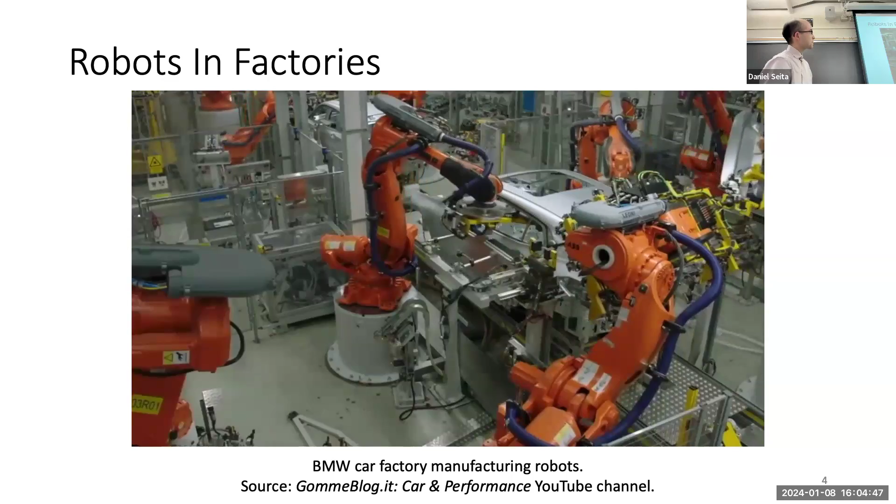This is really nice and effective for something like mass production, where the robots are doing the same thing over and over again, because you could just program the robot so every time this new thing happens, it just goes to the same picking pose, the same placing pose each time. So the robots are very reliable when you ask them to be repetitive, and when they know everything in the environment.

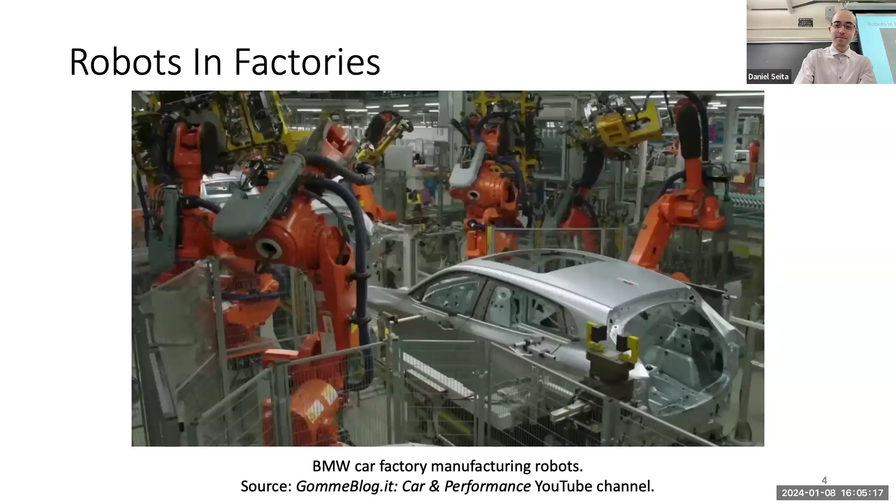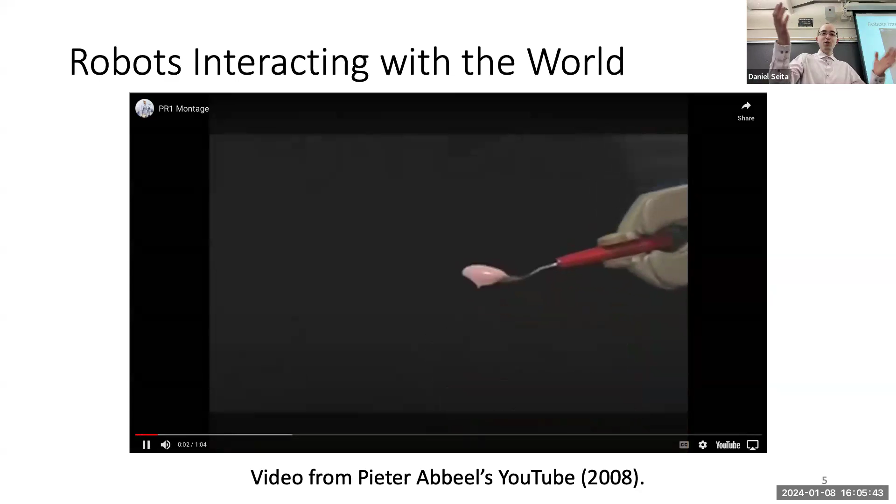But let's talk more about robots that we might want to interact with in our world, in the less structured portion of the world. This is a video shared from Pieter Abbeel, one of my professors at Berkeley, and I'll just play the video. It shows this PR1 robot, a really old robot that I don't think people can make anymore, using different utensils, putting things in the dishwasher, and sweeping stuff.

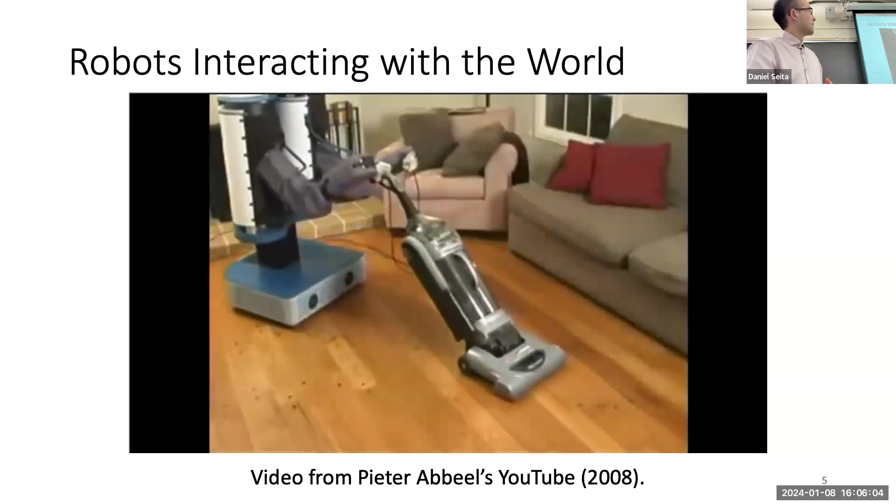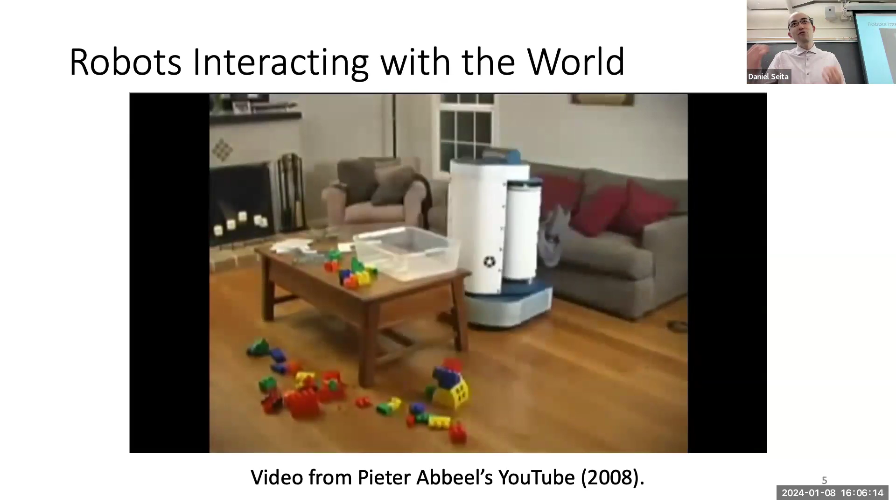So the dream that many robotics researchers, myself included, have is that it would be nice to have robots that can do stuff like that, like maybe a home robot that we can ask to do different chores or to help us live our daily lives.

But the problem, at least with this video, is that everything is teleoperated. There's a human operator controlling the robot. In this case, I think it's a beer can or something, and the robot is trying to open the cap and give it to the person. But while this is happening, there's another human that's not shown who is controlling the robot.

The key takeaway is that if with the hardware, a human can control the robot to do many interesting things, then maybe we just need better algorithms, because we have the hardware. The hardware we just showed can do this. We just need to help the robot make the decision autonomously instead of the human teleoperating it.

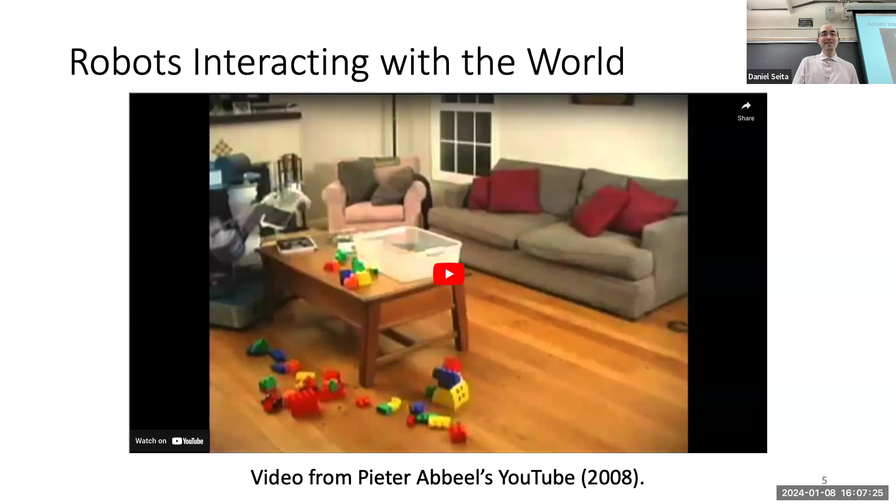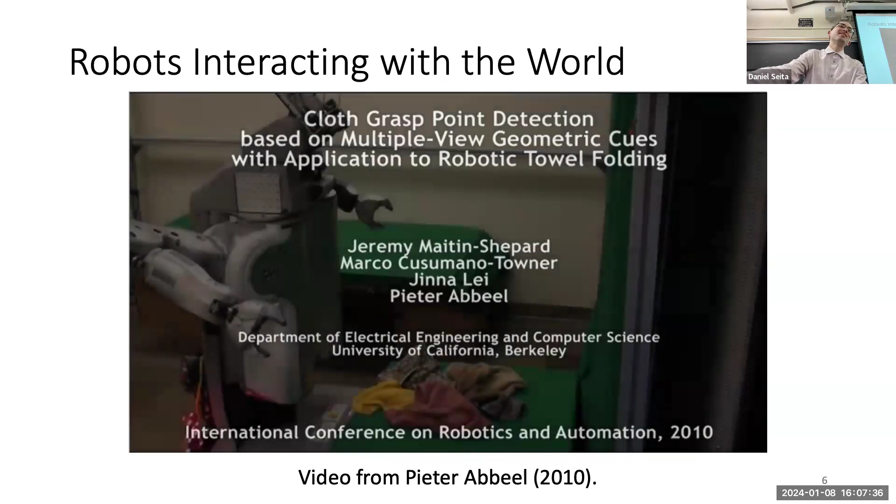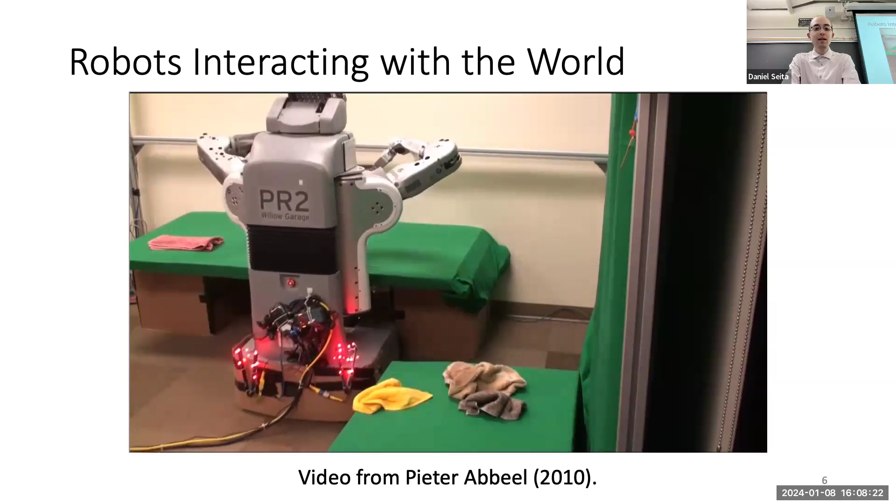Here's another fun video, also from Pieter Abbeel's group, showing the PR2 robot, the next version of the PR1 robot. It has a bunch of towels, it's grasping and scrutinizing a lot, trying to figure out where to grasp so it can grab different corners. Once it's been sufficiently grasped at two corners, it does a hard-coded folding procedure, then repeats. This was autonomous - they developed this algorithm so the robot could do this task with no human teleoperating. It's a nice result on how you get robots to do these things.

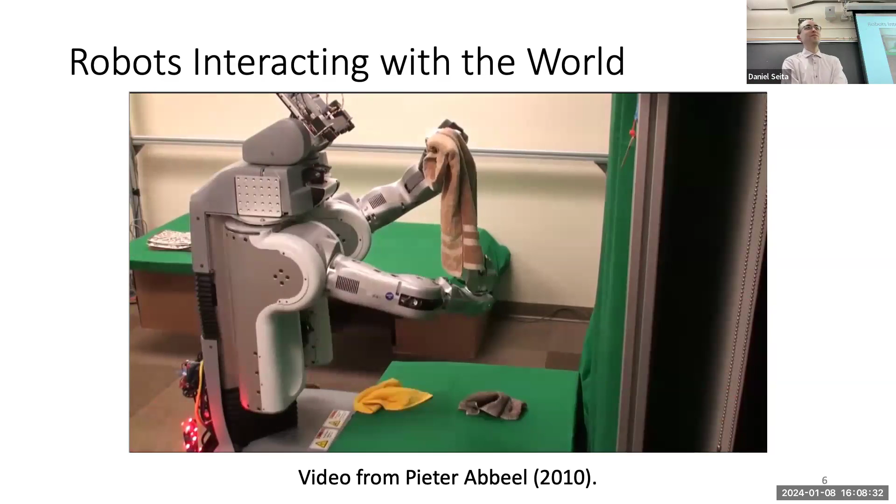If you look at the YouTube video comments, you see a bunch of people saying, wow this is very cool, I want robots like this in my home. Even for people who are a little more technical, it's still a nice system result to show robots doing this.

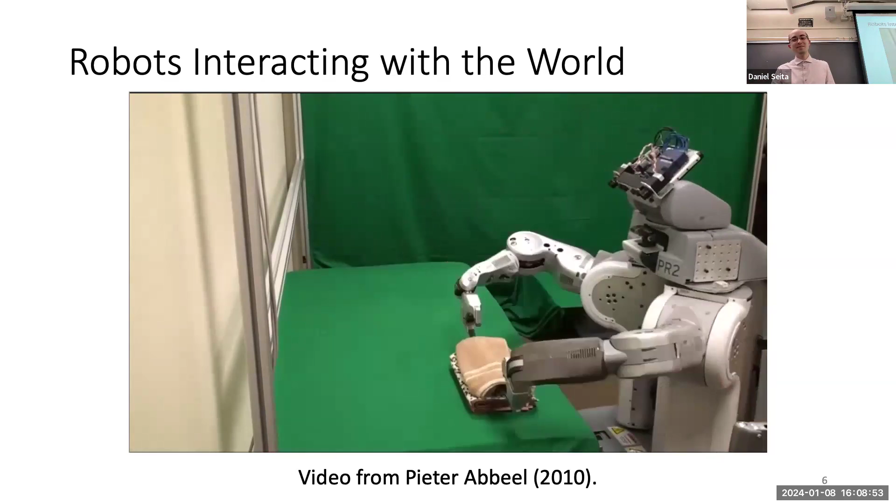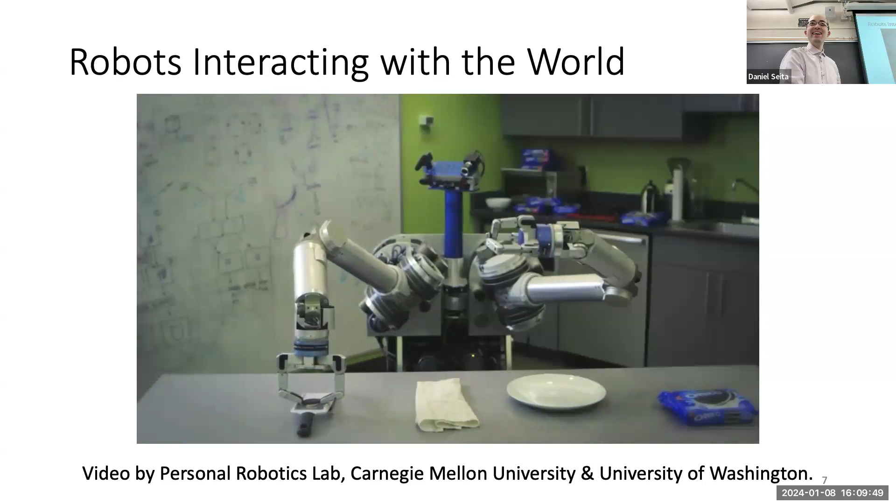One thing you'll hopefully learn from this class is that fine grain manipulation is very difficult. Robots tend to be very good at things like putting together massive car parts, but less good at fine grain tasks like knot tying. It's scraping away the inside of the Oreo cookie - the filling, the cream.

This is a video from a lab here at USC from Stefanos Nikolaidis, who actually taught this course last semester.

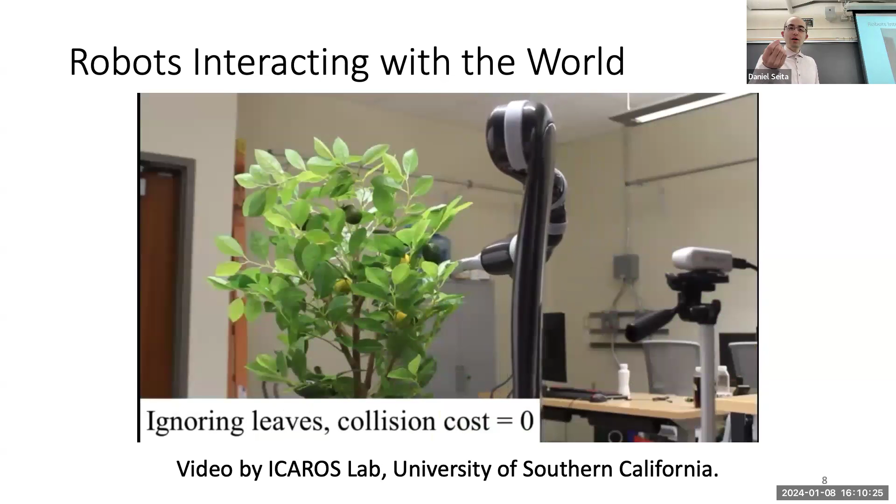Here's a nice video where they're trying to do robotic fruit picking. The objective is they have this robot arm trying to go inside a tree to retrieve some fruit. From a technical view, one interesting novelty is that they're making contact with parts of the tree that aren't what they're grasping.

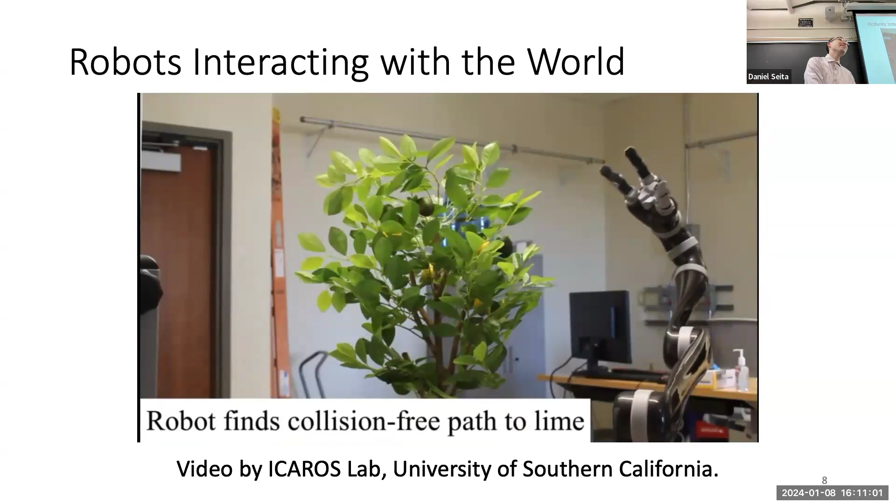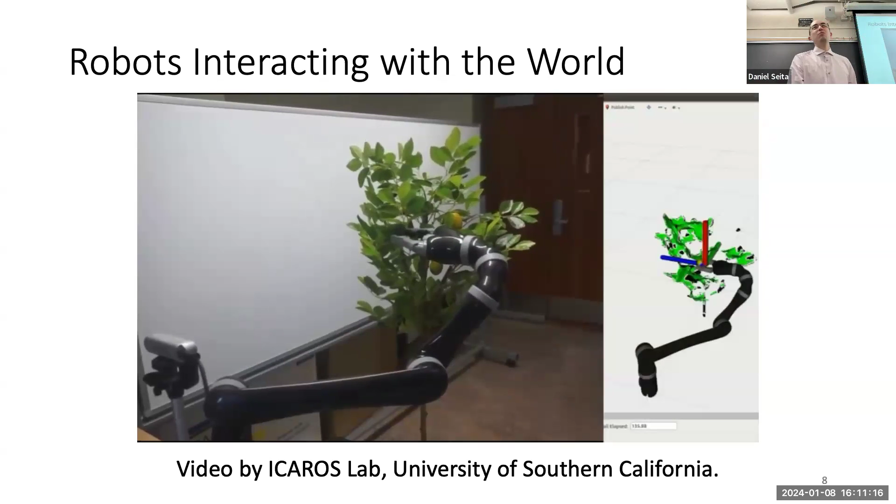You'll learn later when we talk about motion planning that when we want robots to execute trajectories in the world, we want them to reach a pose but make no collision with obstacles. But with leaves, it's not a problem if we make contact - it's not like delicate wine glasses that we cannot touch. We'll talk more about that when we discuss motion planning and how robots decide how to reach a target subject to different constraints.

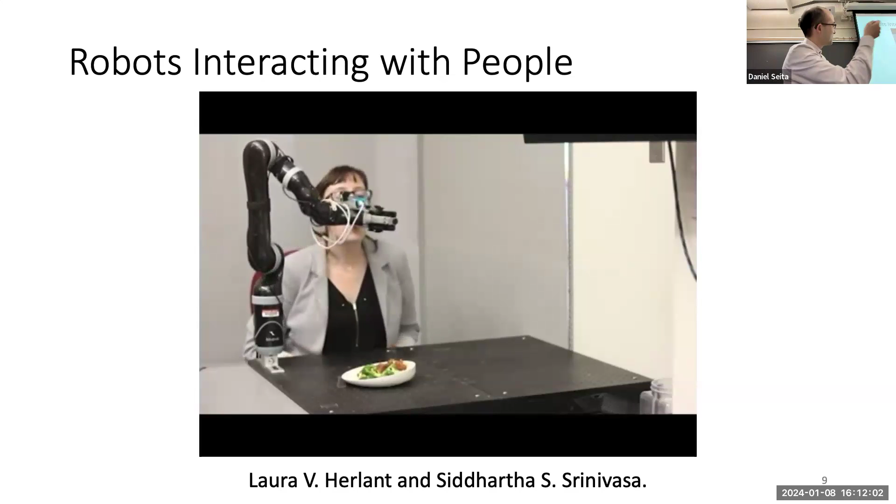In this case, there's some food here, I think it's maybe broccoli, and the robot is giving it to the right pose for the patient to eat. I don't know if it's a patient here or maybe a researcher.

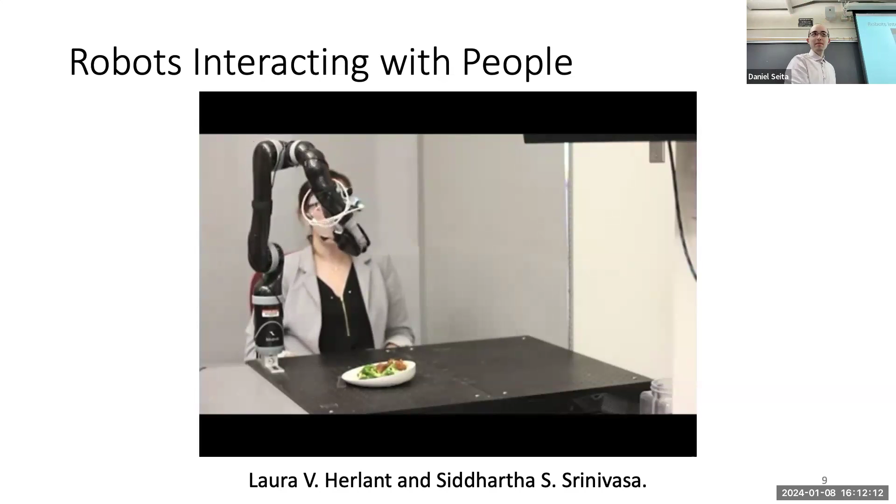When we design robots that do this, we have to take into account not just the kinematics of the robot arm, but the tool that it's holding, or maybe the tool that happens to be attached to it.

All right, here's another video. So this is Stefanos, some of you might know who he is, he's the professor who taught it last semester. This is Nathaniel, one of his PhD students. And now they're showing off their really nice system for hair combing. You see all these people taking photos, and it looks pretty cool.

Then I think they're going to do some hair combing soon. Yeah, there we go. Yep, now we have a robot that can comb people's hair.

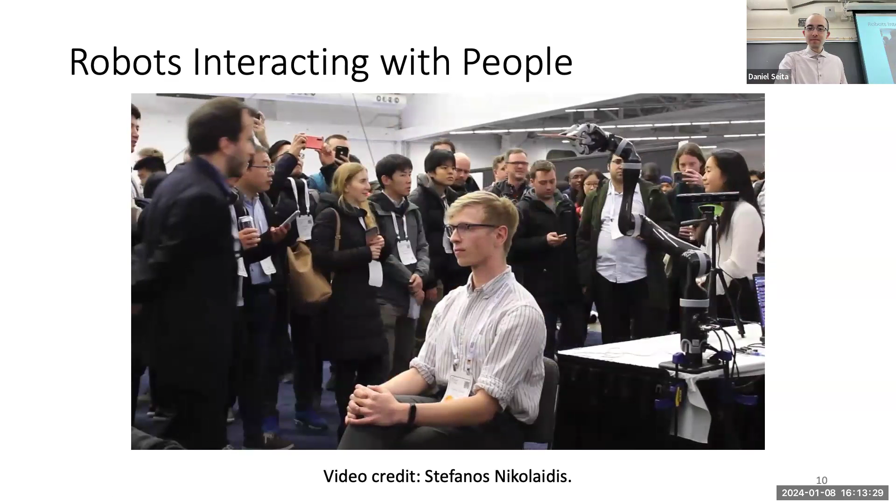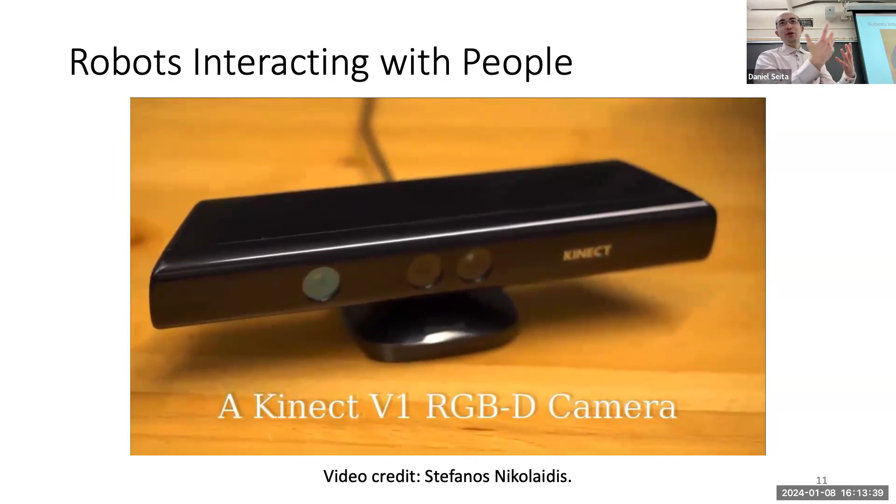And this is in a little more technical detail how the system works. There's some camera because you need to see the scene. There's the robot arm, we have them at USC. You might get the opportunity to use them as part of this class. You have to locate the user's hair, and we'll talk a little bit more in the perception part about things like color and depth and how they're used in robotics.

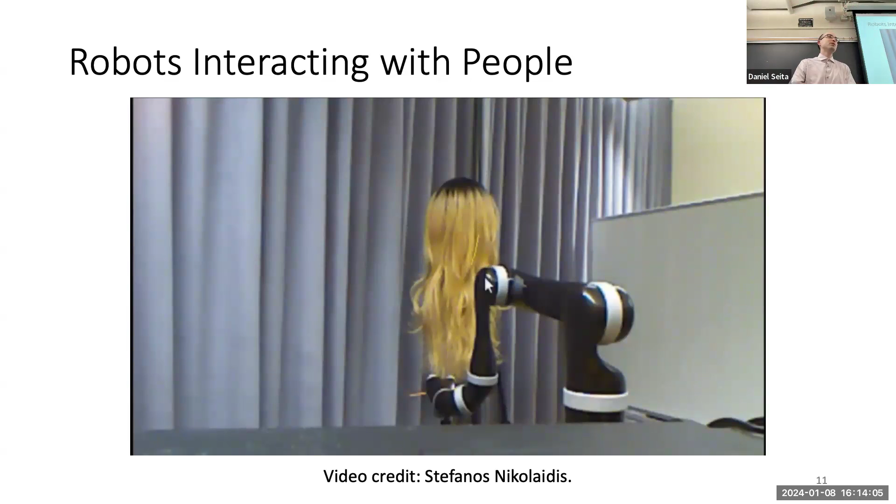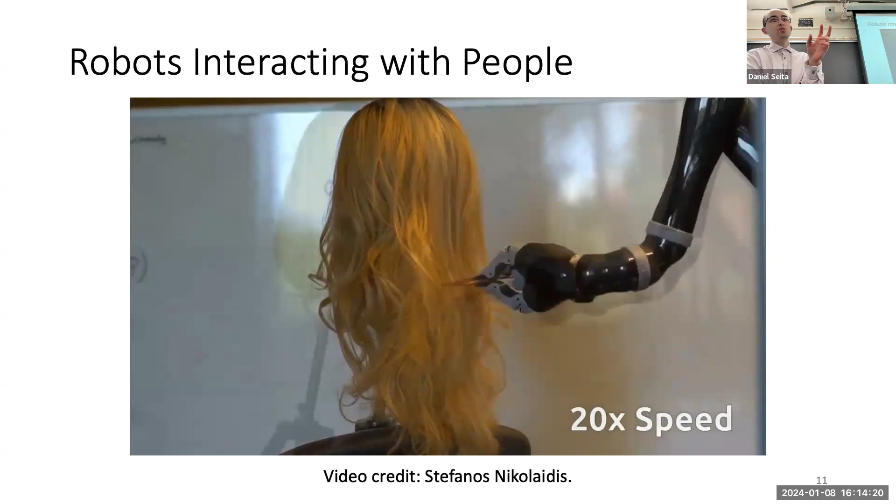And as with many things in robotics, it helps to test in a simulated environment, or something that's not the real thing, before you deploy it. So that's the test scenario. And it's 20x speed, so just be aware of the speed of the video when you look at a lot of robotics videos, because many academic researchers will speed up the video for obvious reasons. And many robots also move very slowly, also for obvious reasons, to keep things safe.

Hi, so there's many more robot systems. These are just a representative sample of some systems that people have done. So this is a nice system that shows the mobile robot. And the researcher here, Jimmy, was trying to train these robots to push blocks to that receptacle.

One of the things he did here was use a technique known as reinforcement learning, which we will talk about later in the class, on how to more efficiently move the item to that receptacle. So instead of doing it one by one, the more sophisticated version will try to group them together and then use the wall to get more of the blocks there at once. That's a little more efficient use of the robot's time.

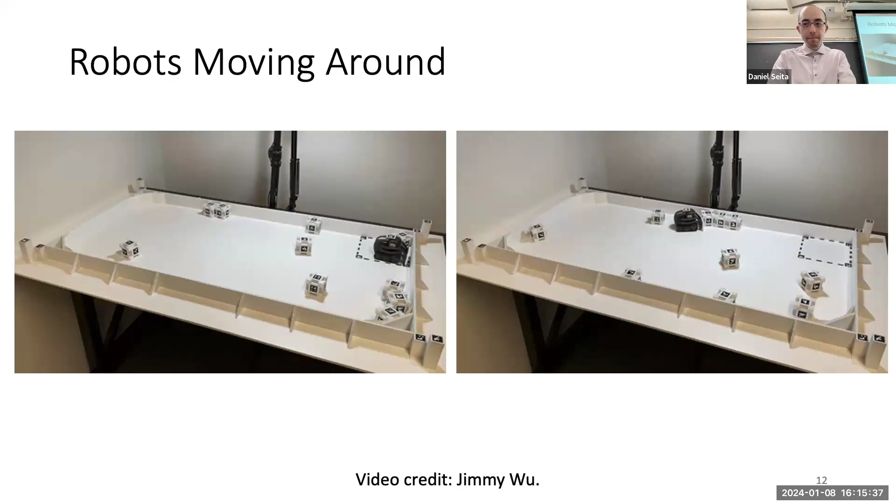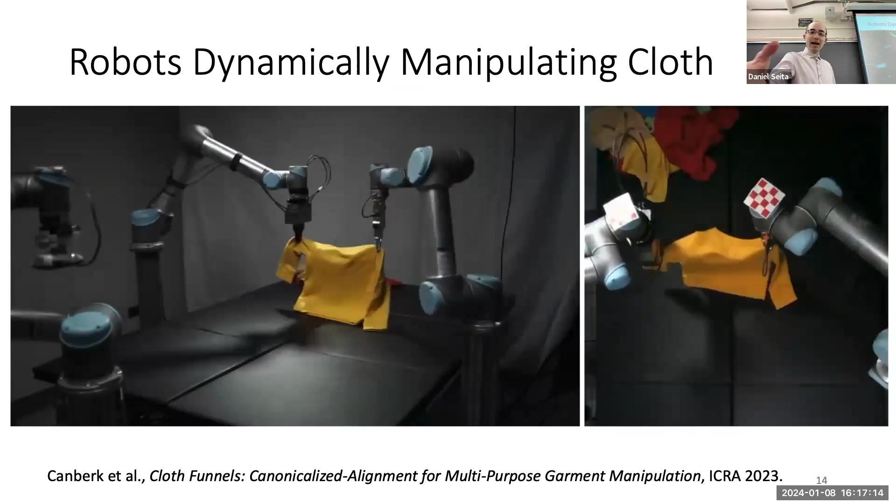Robots can also do things like dynamically manipulate cloth. This is actually a dual arm system—there's a third robot that's just holding the camera. Here they're doing a bunch of picking and placing to try to smooth it, while also doing dynamic motion to spread it out. The nice thing about this work was it showed how you combine a dynamic motion with what we call a quasi-static motion, which is a slower action that lets the object stabilize before the robot does another action.

Let me play the video again, it's a bit short. And then, yeah, you see the dynamic motion each time they do it.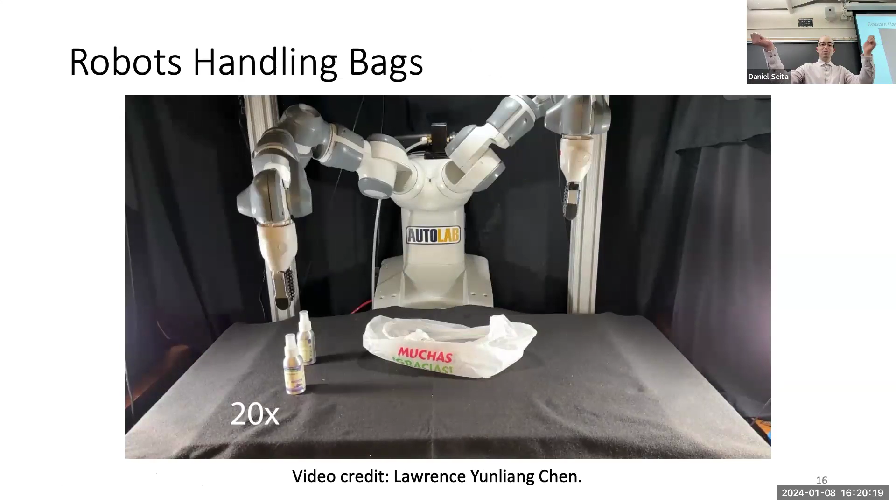All right, so this is one of the works that I was on. I helped to advise this project. Lawrence is a PhD student at Berkeley, and he helped to build the system that performs actions on these highly deformable bags. So the robot is able to do a bunch of primitive actions, and then once the bag is sufficiently open, it can insert the items in there.

I'll play it one more time. Again, the video is at 20x speed, but a lot of the delay is because we had to take the image and then do a lot of operations on it to segment it and decide what to do next, and so on.

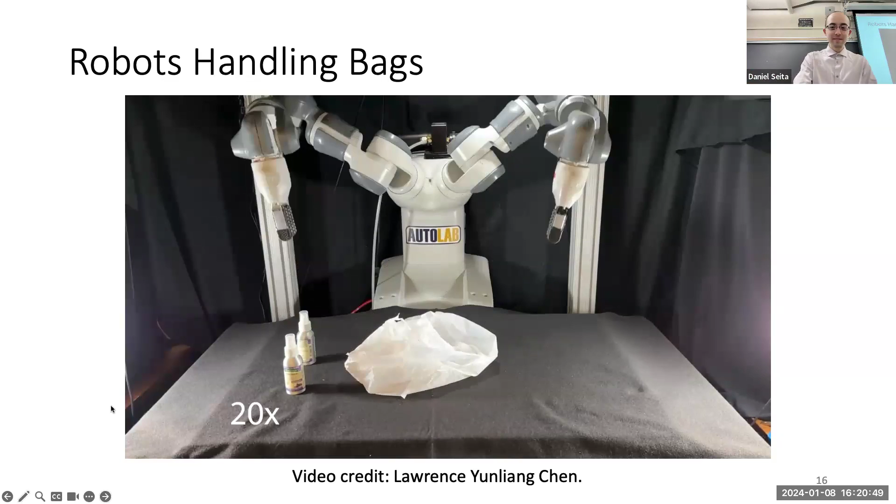And this is our follow-up paper, which we presented a few months ago. Here we're trying to separate different layers of the bag. So the intuition here is when the robot is trying to pull and separate the bag, you can detect whether it got the layer or whether it didn't.

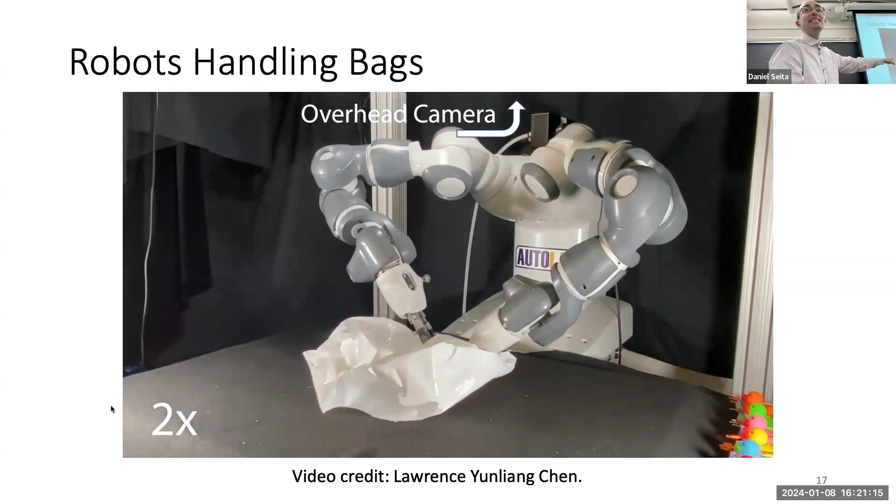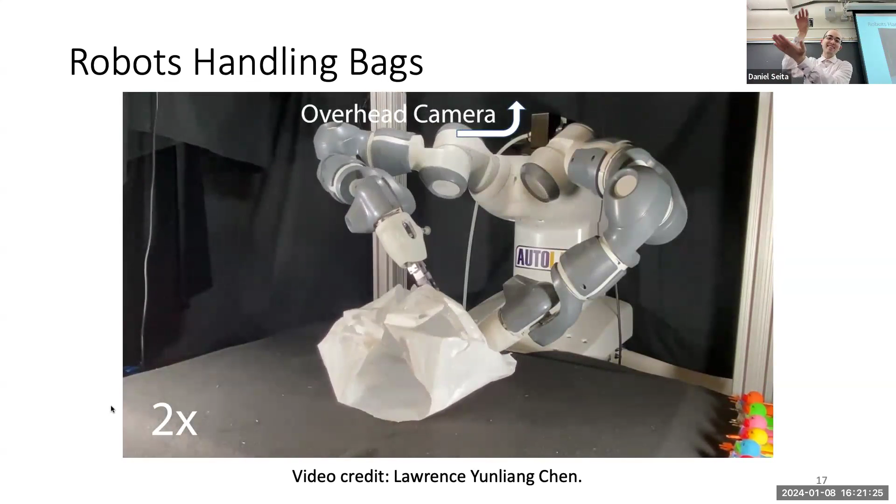In the first case, it didn't. It didn't do it again. But each time that happened, you can just lower the height where the gripper goes. So if you lower it enough, then eventually you'll separate the layers. That kind of thing is often the first step in order to do a lot of interesting operations on the bag.

All right, so robots can also operate on dough. This was work that was presented at the Conference on Robot Learning a few months ago.

So the researchers are trying to get this robot to make a dumpling. It involves things like, you start with a dough, you pick a tool—they use different 3D printed stuff to help, so that the robot doesn't actually grip the tool, it just attaches to it.

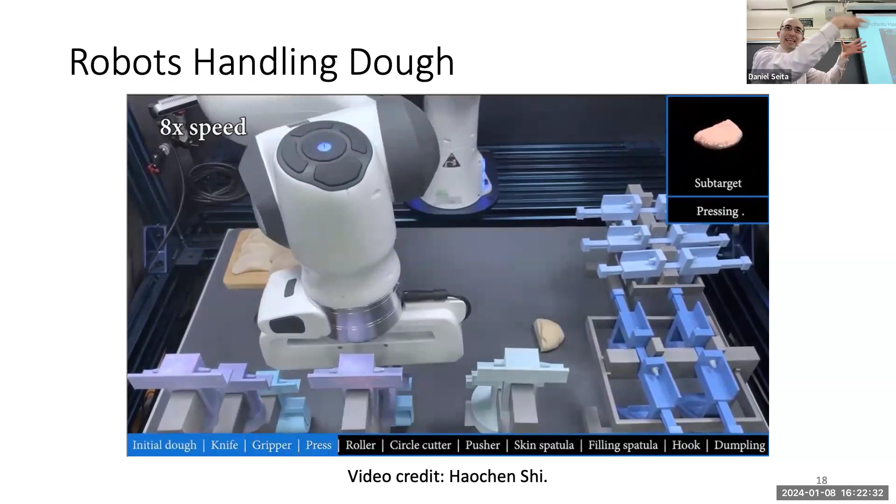And then once you're at that stage, you'll now flatten the dough, and then they have to try to make it even. Then they flatten it, and I think they have to use the tool to make it circular. And then they have to brush aside the remaining stuff.

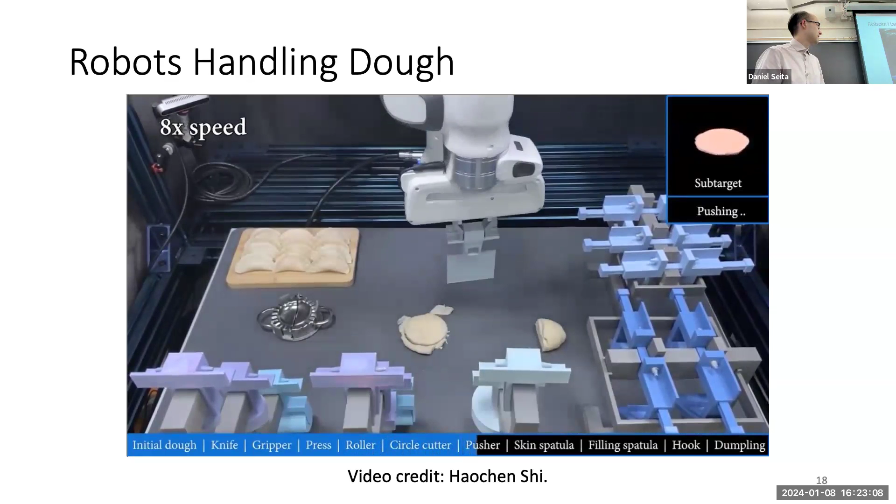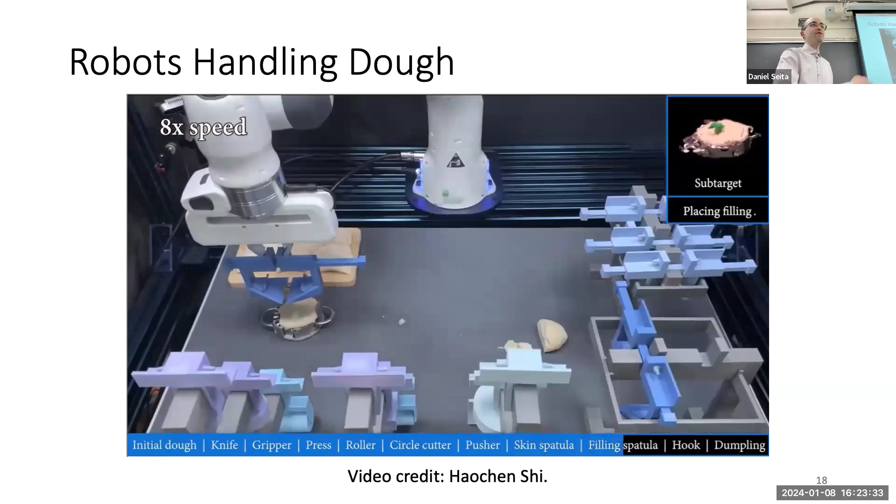And from a technical view, each time the robot is at some stage, there's a classifier that is trained to predict what tool should be used next. And conditioned on a given tool, they restrict the action space to be specialized to the tool. So it's not the most flexible action space.

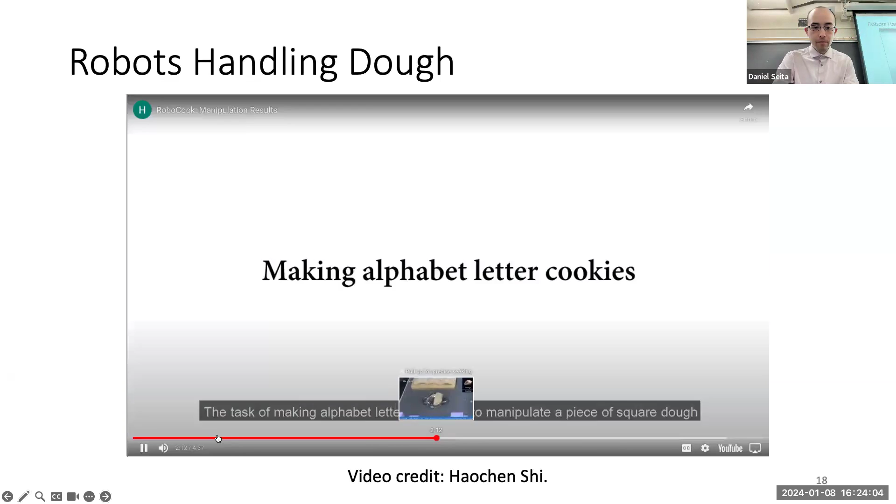And then they show that they make the dumpling. Of course, it has a small amount of filling, so it's not like it has a huge amount of filling inside, but maybe that's future work, they can increase the size of the filling. You can look online for the rest of the video, and they also have some nice robustness results where a human operator tried to destroy part of the dumpling, and it shows the robot can recover from that and continue.

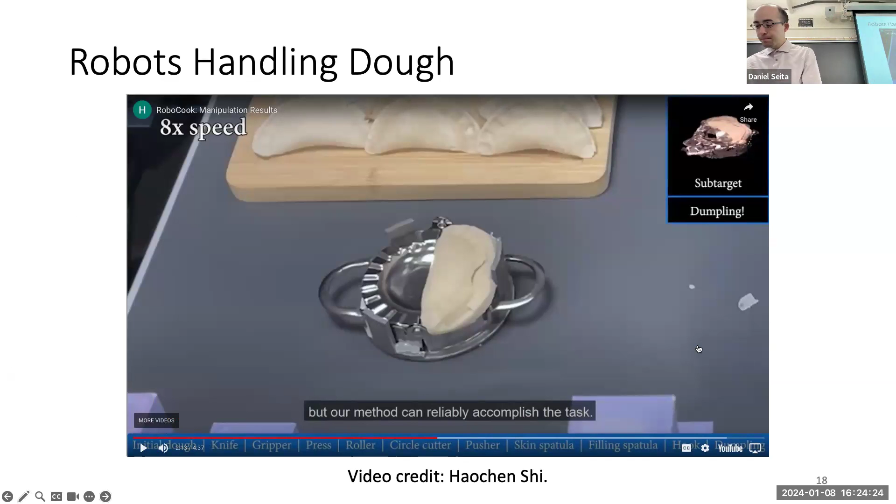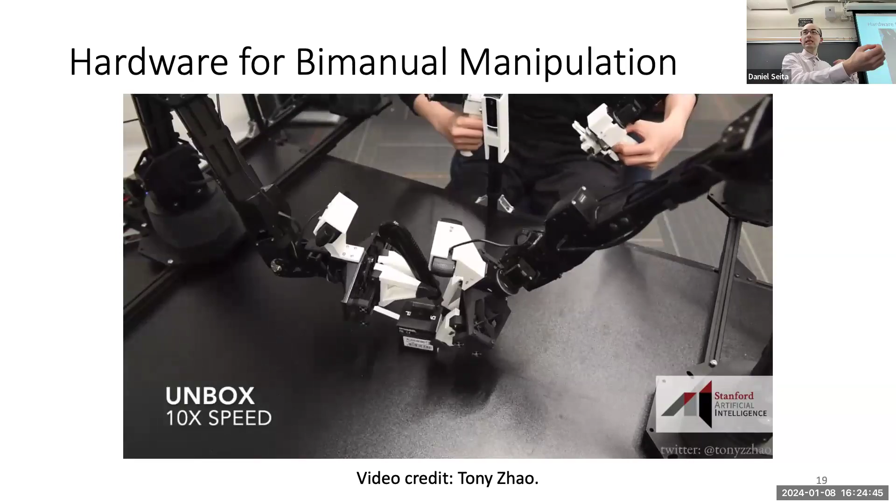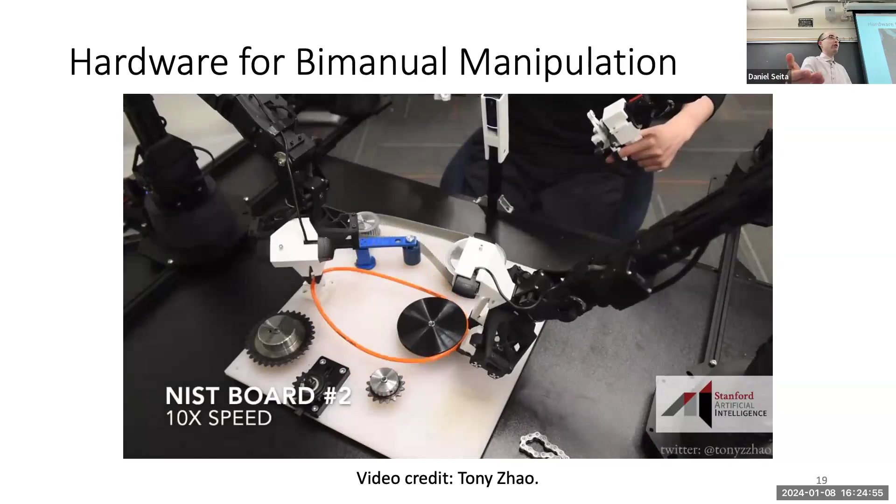Tony from Stanford helped build this bimanual system called the ALOHA system. This is the human doing the teleoperation. I guess the point of this video is to show that this hardware is capable of doing many delicate, fine-grained tasks.

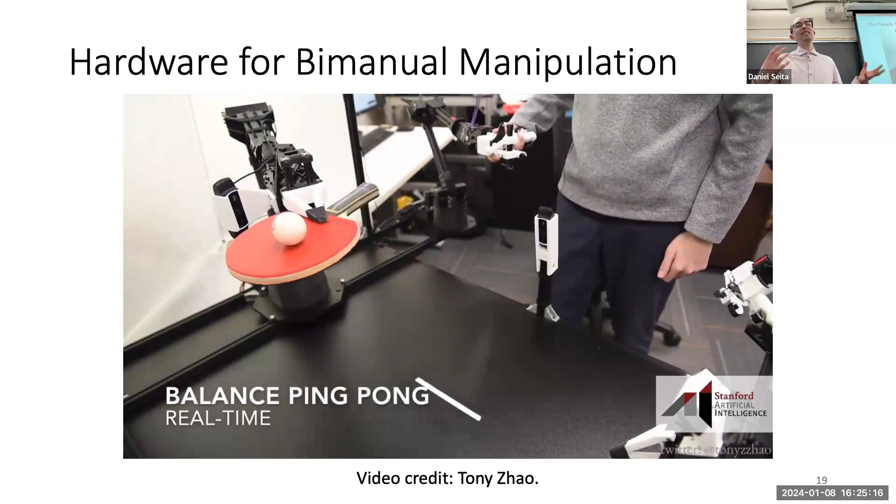If we can do teleoperation, maybe that gives us demonstration data to help train the robot to do similar manipulation tasks. Remember I mentioned earlier that fine-grained, delicate manipulation is very difficult for robots to do, so I think they're trying to push forward in that direction.

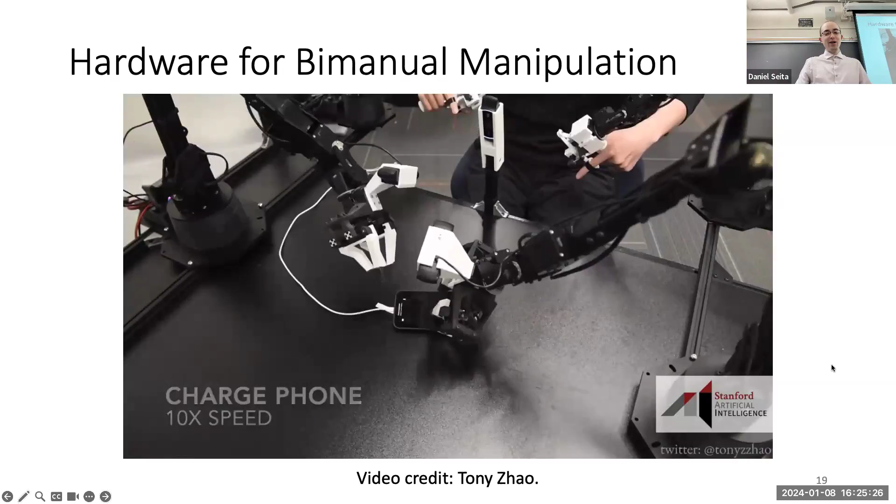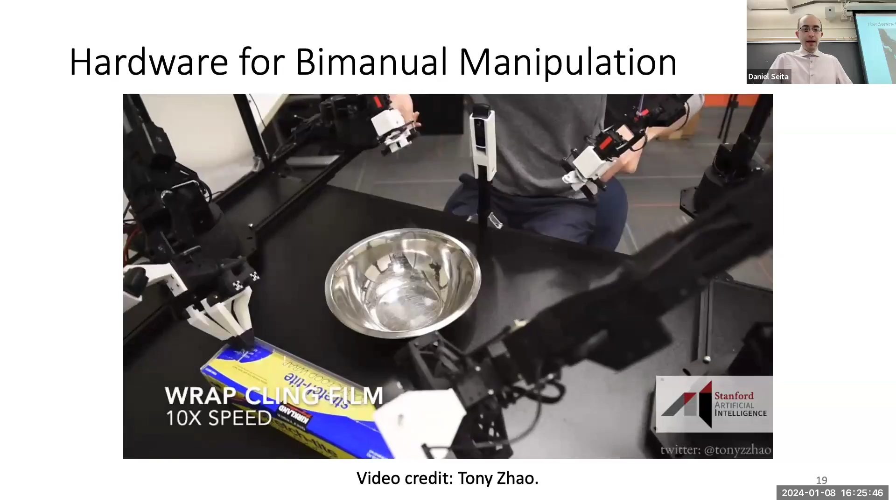I'll play the whole video because it does look pretty cool. In addition, you can look at the website to see the autonomous robot learning from the demonstration and then deploy to do the task. This particular thing is not using any tactile feedback, it's just using mainly the visual part.

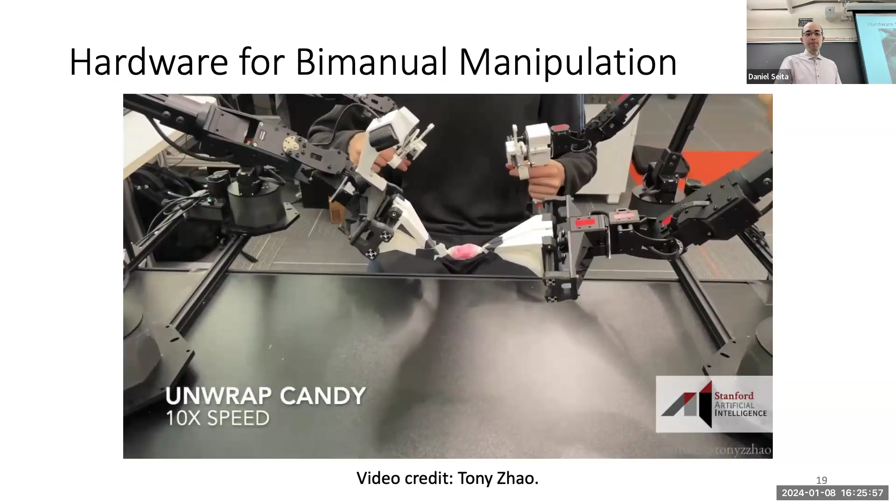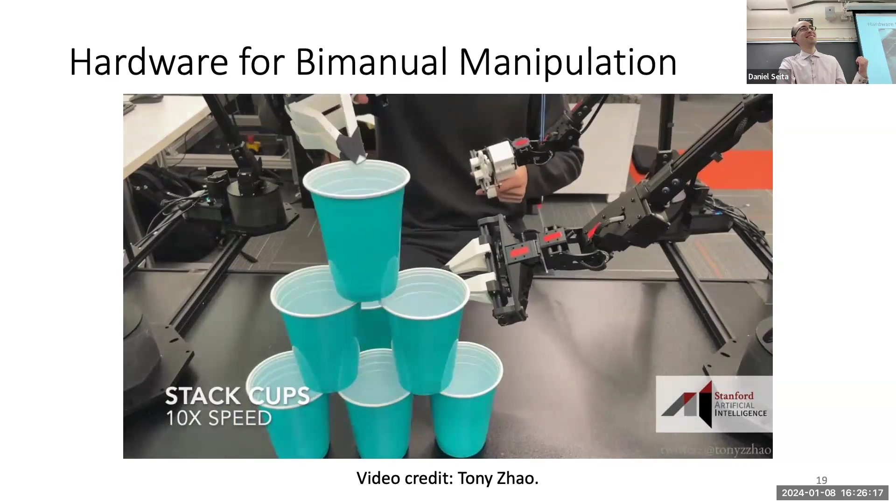How many of you know what slide I'm going to show next? Yeah. Oh yeah, I mean, what do you think? This thing? Okay.

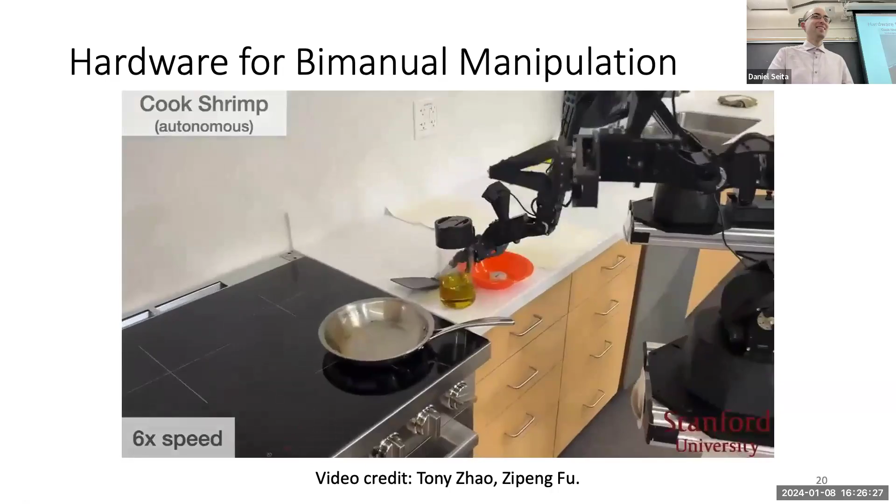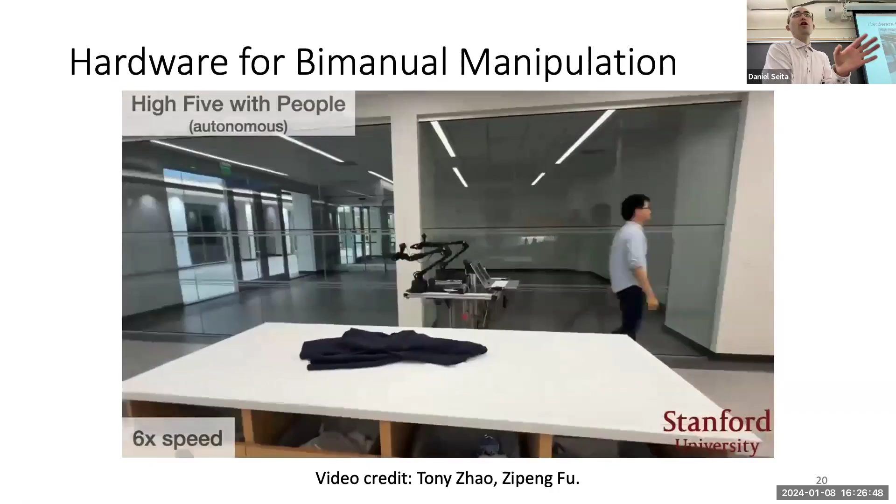A few days ago they announced the mobile version of ALOHA. This is their system now. It's mobile now, so it's like a similar set of grippers, but they made it mobile. From an algorithmic view, I'd have to read the paper to find out more, but I think they're using similar techniques of learning from demonstration, just that the hardware is different. From what I know, they also made a lot of improvements since the original ALOHA hardware was first presented.

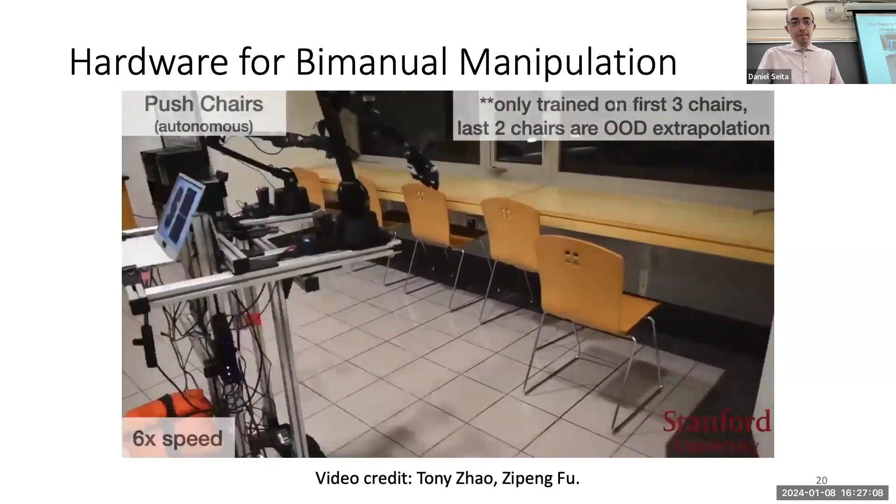Yeah, here they're doing it autonomously. Great result from Tony, and I think Zipeng as well, and Chelsea, their advisor.

Yeah, do you have a question back?

Is there anything that robots can do that's better than what humans can do? Well, there are many things that robots can already do today better than humans. It depends on what you mean. If you're talking about a generalist robot that can manipulate anything in the kitchen, then I don't think we're at that level. But if you're talking about a single-task robot that can manufacture a car, then they're already way better than humans. So it depends on whether you're conditioning on a robot doing one task in a very structured environment, in which case they're way better than humans. But if you're asking them to be very generalist and operate in someone's home, I don't think they're at that level, the human level. So that's my summary.

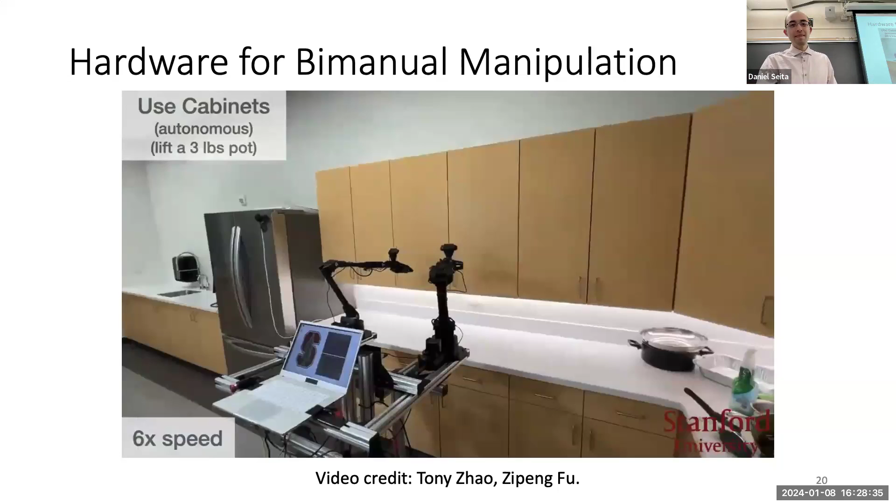Oh yeah, any other question? And I'm checking the Google Doc as well, where you can type in questions, but I don't think anyone put in a question there.

Hopefully that was a lot of interesting video to get you interested in the topic. So just a couple of administrative things for the class, and then we'll talk a little more about some more videos.

Some of the learning objectives for today, or for the course, are that we'd like you to get a lot of proficiency in many of the tools that support state estimation, also for manipulation and for planning. What we mean by this is that for state estimation, many times robots have to operate on assumptions about their environment. So if the robot is trying to do that cooking-related task you saw, then the state of the world or environment is going to be something like the item it sees in front of it, or maybe the state is interpreted as an image observation, and so on. There's different ways you can interpret what that means.

Often, or basically in any real world robotics deployment, there's always going to be some noise. When robots have cameras and they look at some scene, there's always going to be some noise. Maybe the camera doesn't perceive the depth values correctly, which often happens at edges—we'll cover that later in the course. There's also errors in when the robot does something, like if the robot tries to move forward by 3 meters, it might move 3 meters and 2 millimeters instead. So there's always some noise. Sometimes it doesn't matter, but in many cases you really need to be precise, like in robot surgery, where you need to be absolutely precise.

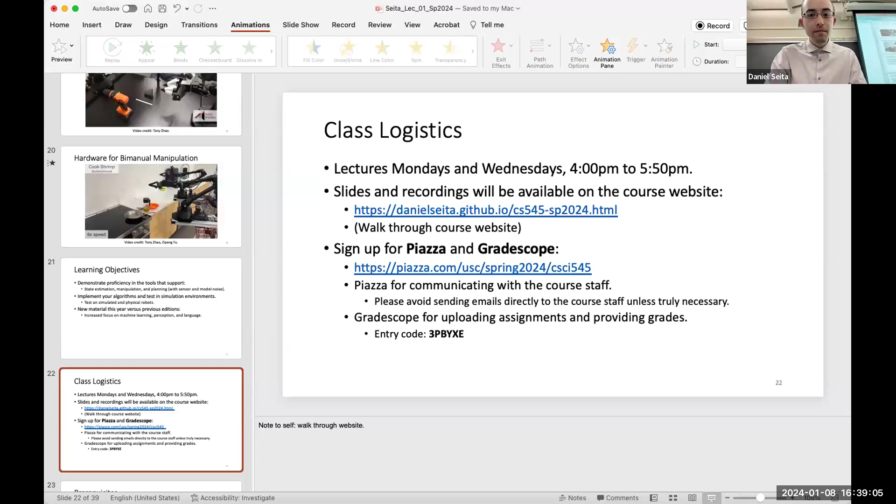Okay, hold on. It should still be fine.

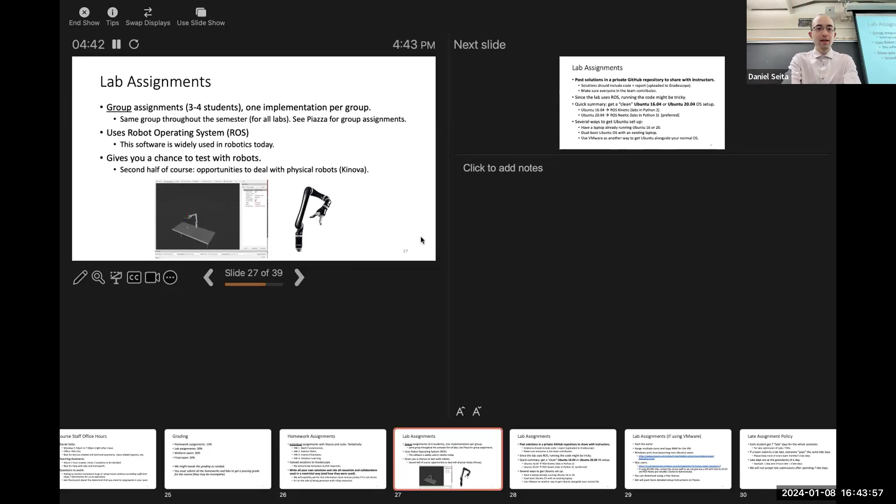Because the labs use ROS, it can be a little bit tricky to get set up, so here's a quick summary. Before that, all the teams should have their own private GitHub repository - just don't make it public - and then you'll contact the course staff and you'll share your own solution to that.

In order to get set up with it, what I would recommend is trying to get a clean Ubuntu 16 or 20 operating system set up, which depending on what resources you have at your disposal, can be a little bit complicated to get set up.

We have 2 versions of the lab. One uses Ubuntu 16 and ROS Kinetic, which unfortunately uses Python 2, which has been deprecated for quite a while. A more recent version uses Ubuntu 20 with ROS Noetic. But you can do either way, just let us know which version you're using in your code.

A couple of ways you can get set up: if your laptop already runs the right operating system, you could just install ROS and see if it works. If your laptop is not like that - if you're like me and have a Mac laptop - some options are maybe you can do a dual boot, or you can use VMware to get a virtual Ubuntu setup simultaneously with your normal operating system.

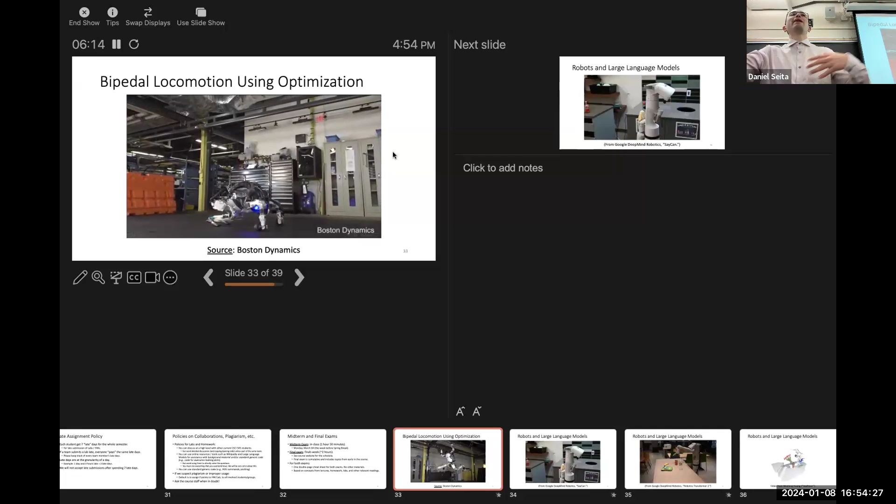So, Boston Dynamics - I don't know if many of you are familiar with them. They're a company in Boston, most well known in the robotics community for videos of a humanoid robot doing acrobatics. You can see what it's doing here - it's doing a somersault.

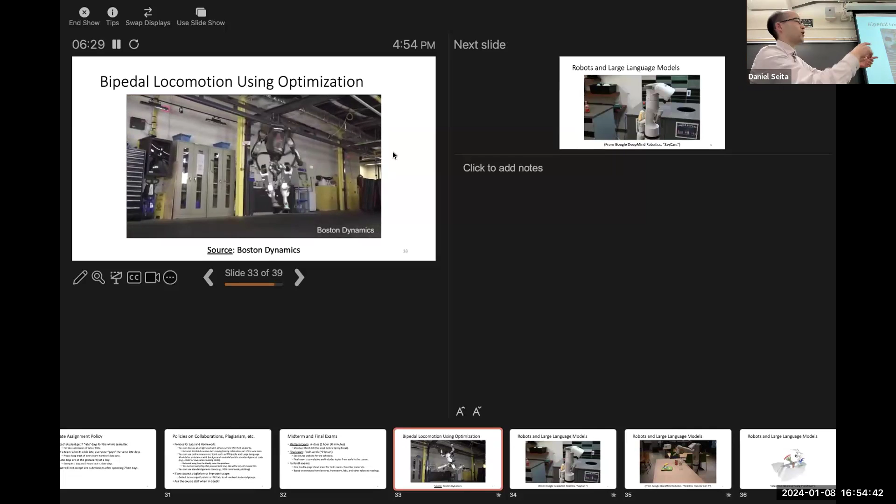And they have other videos too, like backflips - you can find these online. I think the method they're using is more based on optimization, like trying to optimize the pose of a robot subject to some constraint. I don't think they actually use a lot of machine learning, but it's hard to tell until we see one of their papers describing the method.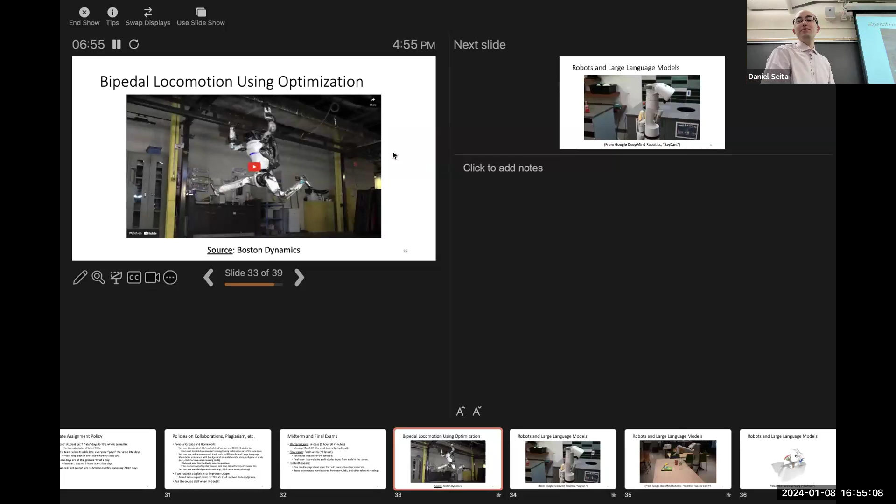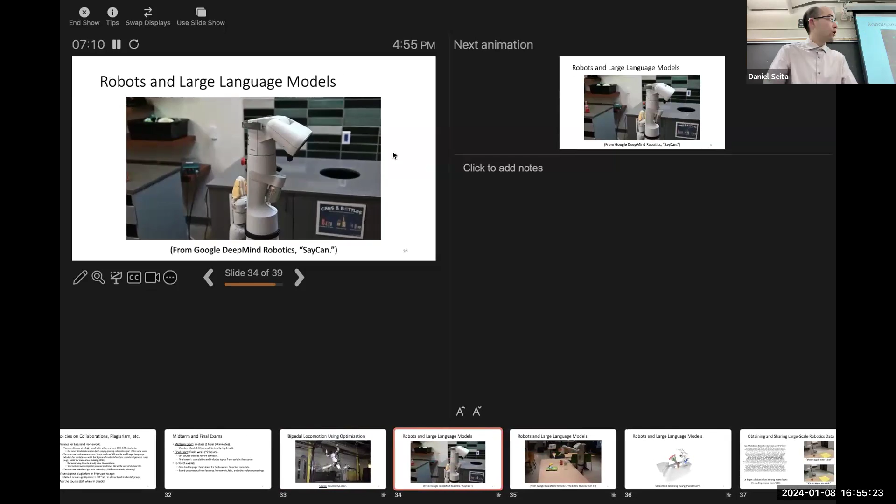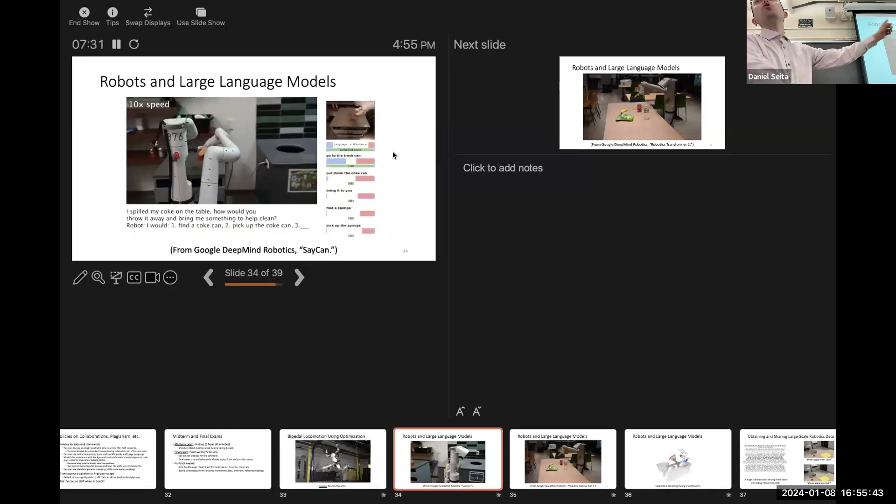So, robots and large language models - this has been a big theme in robotics the last few years. This is from Google Robotics, their SayCan system. The user types in a language instruction, and the key innovation of SayCan was combining the language instruction with what the robot can actually do, since depending on what it sees, it might not be able to do a task the language model suggests.

The language model just sees text - it might tell the robot that if it wants to get a Coke can, maybe it should go to a store and buy one. But that's not physically feasible for the robot. So it was about merging those language and vision modalities together.

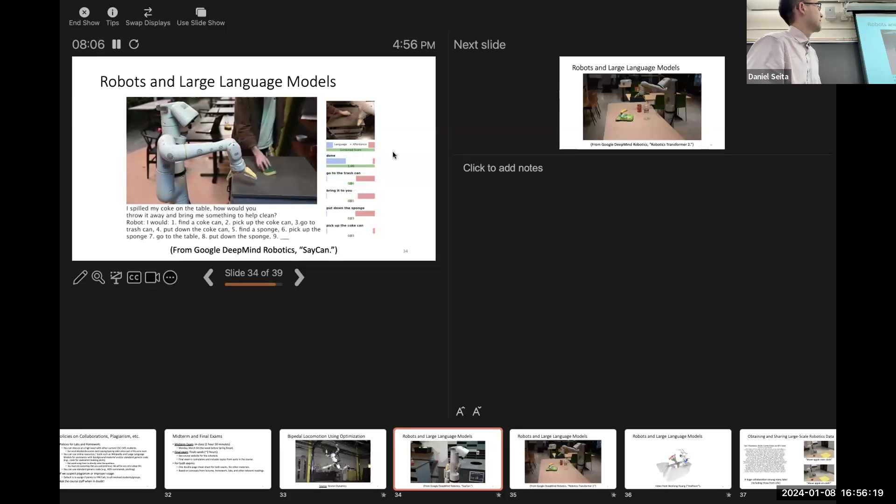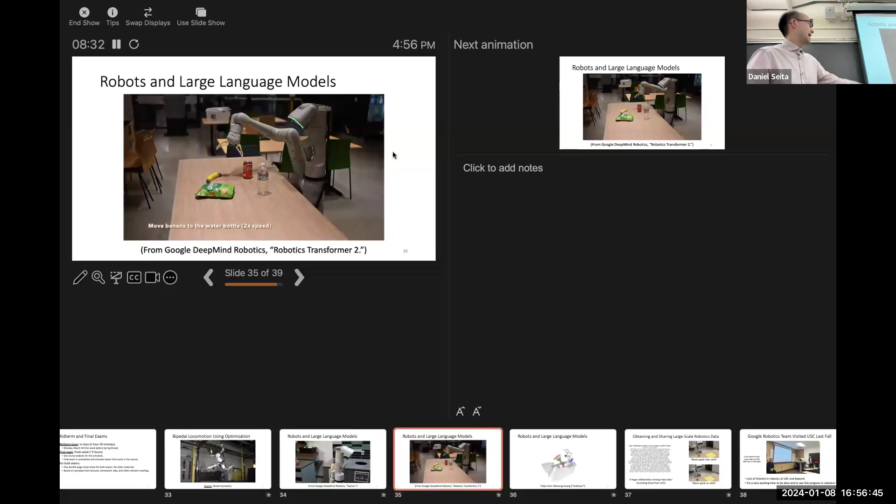This is also from Google Robotics, their Robotics Transformer 2 paper. Based on the name, you can tell there was a Robotics Transformer 1 - this is the second, more advanced version. It can take an instruction and an image from the camera and interpret commands like 'move banana to 3'. One of the key nice things about this is that it's really one system that can do all this.

Also, the language instructions can be a little ambiguous - like 'put the strawberry in the correct bowl.' So what is correct here? It has to do complex reasoning about which one is supposed to be in or not.

Other examples include moving a soccer ball to a basketball, and moving a Coke can to Taylor Swift - although I think that one's a failure. Also moving the Red Bull can to H.

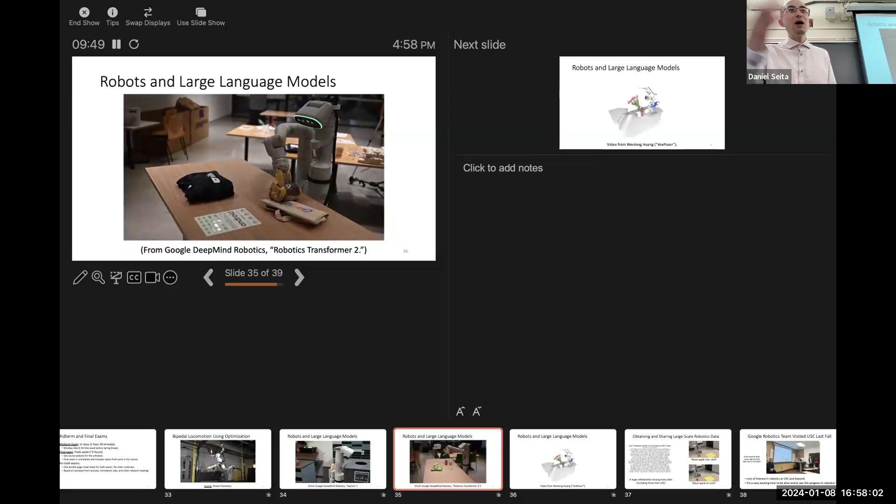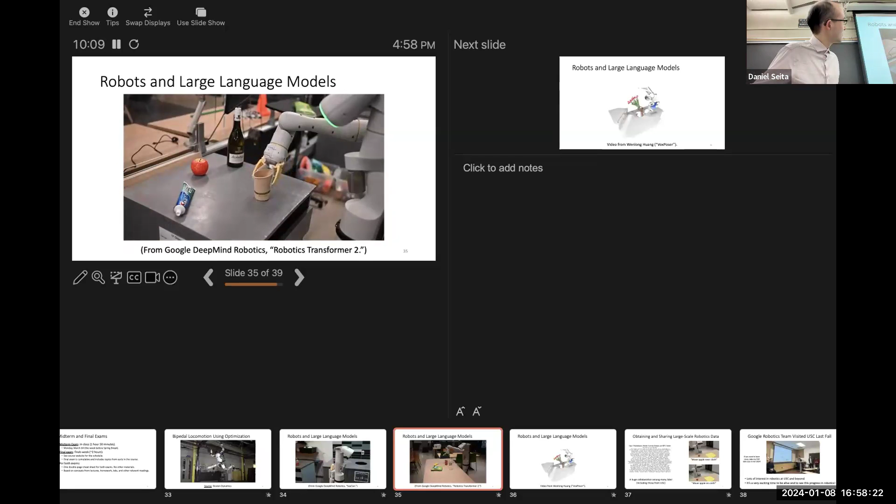All right, now where are we? Oh yeah, so move the banana - what was that? Move banana to the water bottle. There's no banana here - oh, there's a banana here. Move the banana to Germany.

So you can see the system is able to do a lot of complex reasoning, but there are also limitations - this is not close to a generalist robot, and it can only do things like picking and placing at very slow speed. Even then, the movement is very jerky, because the model predicts a small change in the robot's pose each time step, then has to re-query the model, so there's always going to be some delay.

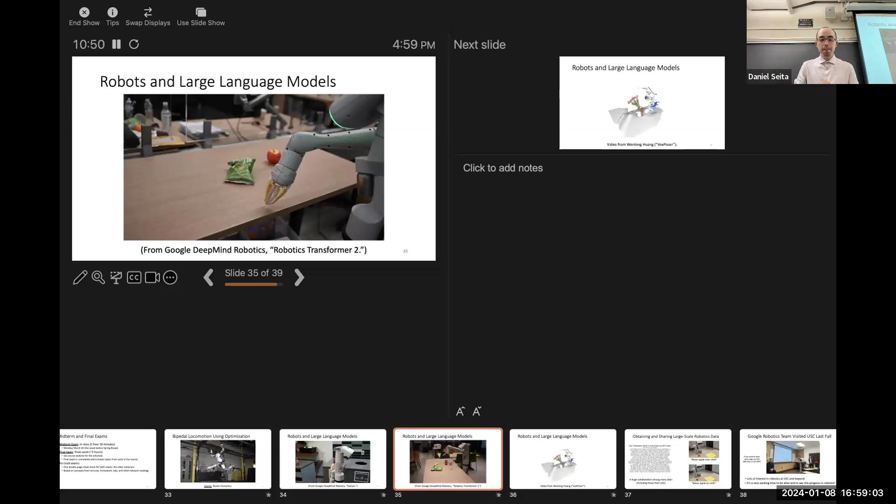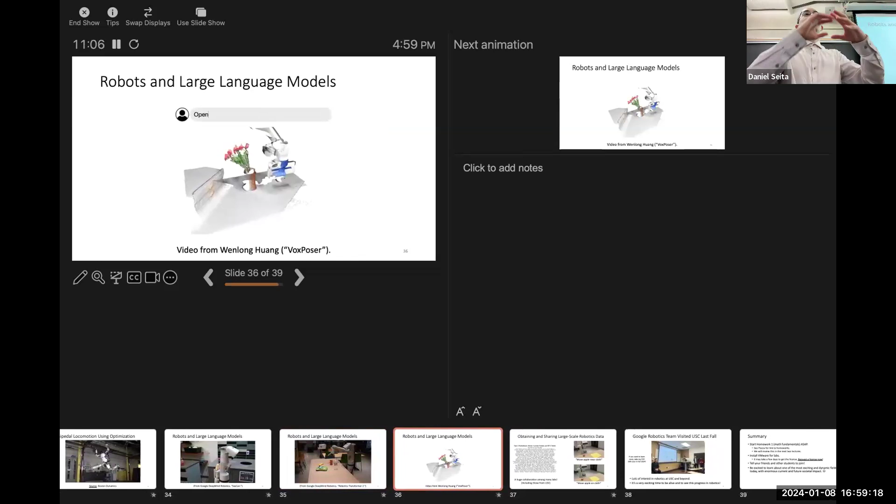All right, then this is another exciting work, one that I'm building upon in some ongoing research. So Wenlong was able to get a system that could interpret a language command, and it could interpret where to grasp, but also which obstacle to avoid based on the language command. And so it combined this language model with the vision language model.

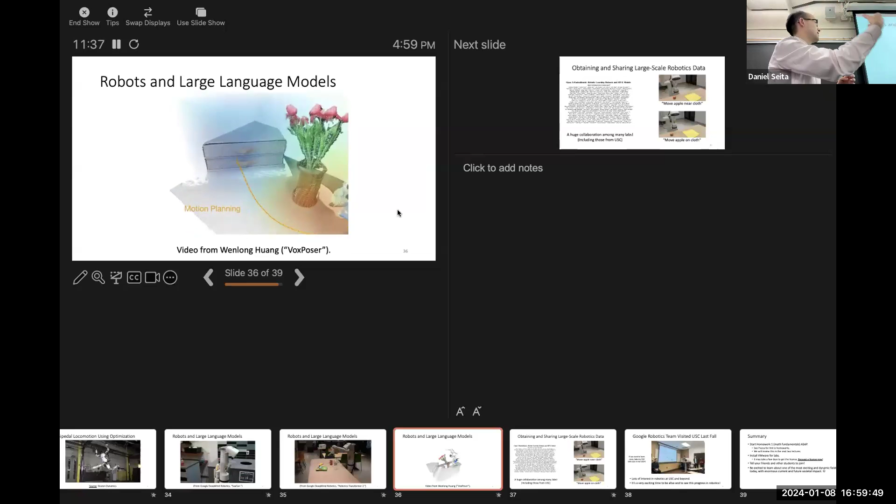And in the 3D world, it creates what we call a voxel grid, where each item in the grid is some cost value. The higher the cost means the robot should not go there, and the lower the cost means the robot can go there. And yeah, these are some of the results. Again, the results have to be tied with a language command, and you see that here.

And researchers have also gotten together to build a lot of larger data sets for robotics. This is an example of collaboration, called OpenX Embodiment. You can kind of see the author list. Whenever you see an author list like that, it's some giant collaboration, including some people from USC, like in Gaurav's lab and others. So what they did was try to combine a lot of data from many different robotics labs at different universities like USC, Stanford, NYU, and Berkeley, and so on.

And the hope is, the more data you have, the more you can use imitation learning—we'll cover that later in the class—to learn the policy. And yeah, you can do stuff like interpret a command like move the apple near the cloth versus move the apple on the cloth. So there's a big difference between near and on, right? And you can see this is also their standard robotics transformer, but still a very, very nice result here.